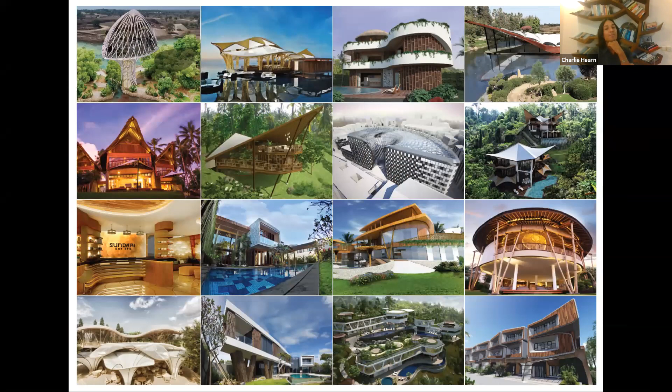We work on a number of types of projects, everything from hospitality, obviously, being in Bali, which is well known for its hospitality aspects, but we also do residential, places of recreation, we've been looking into social housing, and event spaces. So our work is fairly wide-ranging.

But within the company, we share a kind of philosophy, and it's quite a simple one. It's our saying that to improve our well-being, we need to be inspired by the spaces we live in, the built environment, the natural, and their harmonious existence.

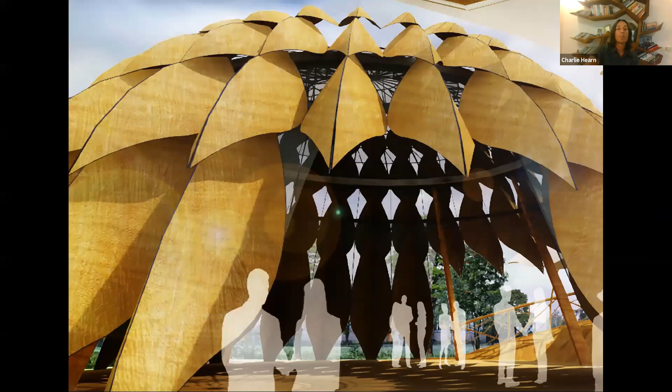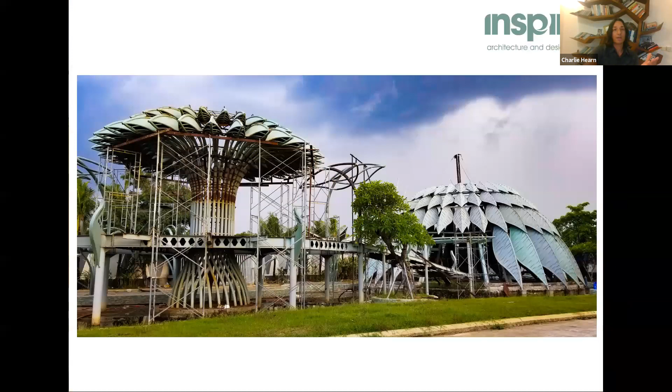This is a project which is actually a community center with pavilions, parks, and places of relaxation. This is an events pavilion, perhaps used for ceremony. This is on an island called Sulawesi, in its capital city Makassar. It becomes a kind of alternate world from the hustle and bustle of quite a busy city, to somewhere that gives a different experience.

Still under construction at the moment, but its design has gone in a direction which brings back the symbolism of the natural world, into a playful sense that creates experience and a sense of longing for what we relate to symbolically in nature.

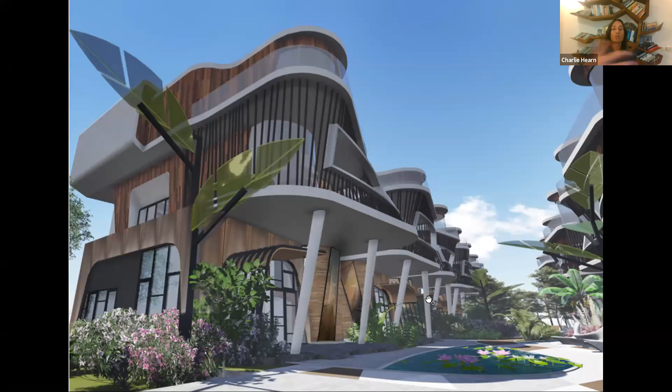This was the first part of the design, which continued to influence the rest of the community built around it. What you find in Indonesia is a lot of these typical townhouse-type architectures—a certain typology of terrace housing.

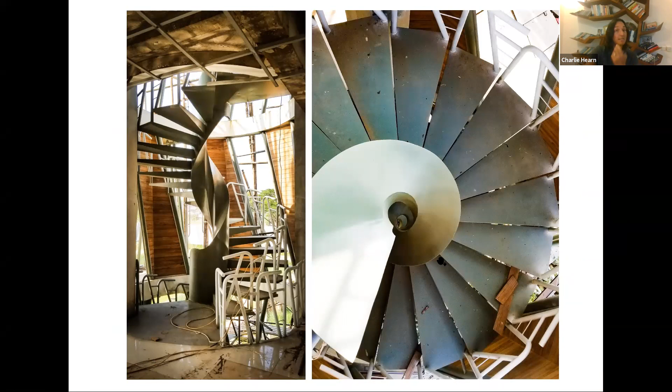So we used this symbolism and this direction of architecture to bring a level of humanity and individualism back into the setting, out of all these individual houses, which would flow from the main center of this community area throughout the whole master plan. And even this flowed through to the inside as well, so we have these interesting spiral staircases and interiors which are very flowing and soft.

All-encompassing to the sense of living—less so machine for living, but perhaps more like a womb experience. When we start in our journey of life, the womb is actually a very functional space, which, like the functional aspect of the rice field, is there to feed, to nurture, to provide sustained living.

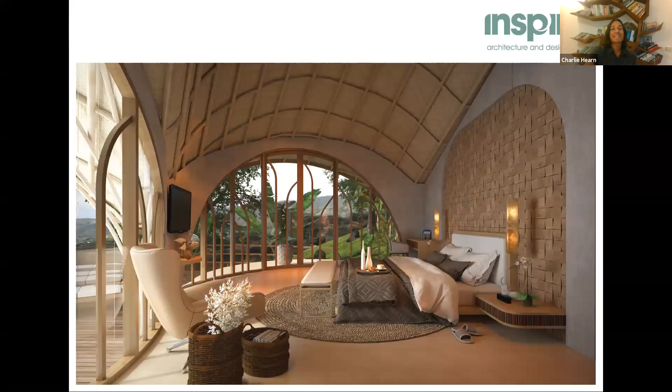So that's perhaps where we spend most of our time, in our bedrooms. Generally, if we look at the way we design from the inside out, our bedrooms are very soft. There's very little in the way of hard corners or sharp edges. We prefer this rounded, naturally oriented, organic feel, both in materiality, form, and aspect.

So we can look at the bedroom as a space where it heals us. From that, it can expand to the rest of the architecture, and this is what it does. When we're designing our forms or our buildings, this sense of flowing and softness extends from the layout to how we start to develop physically.

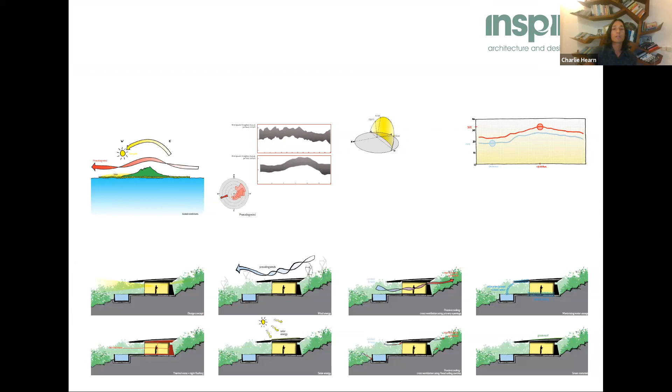As well as taking in all the functional aspects of what constitutes a house—understanding the environment, sun patterns, wind, ways to have natural ventilation and evaporative cooling—all these things come into the fold, as well as our own integral philosophy. So this translates into our rooms, where it begins to have an impact on how we experience space.

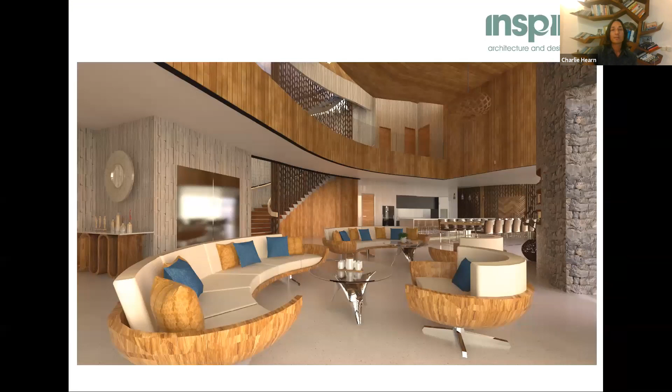So this would perhaps be the kind of typical residence where, for us, it would feel more integrated with elements of nature, through its materiality, through its form, through the way it functions, in terms of minimizing energy, to the flow of space, and how the sense of user experience is perhaps less typical to what one would experience in, say, a minimalist box.

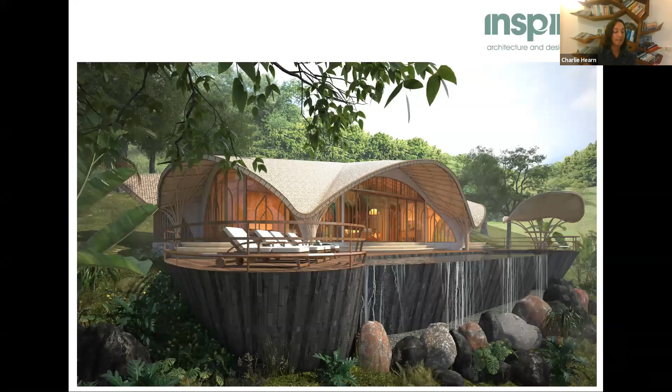But then when we're doing residences, we also have to consider how this works overall in a master plan. From doing individual houses, we also look at how this type of vernacular can be experienced in a community setting as well. So we look to see how we can create sustainable communities, looking at how even the setup of the buildings themselves can mimic the surrounding landscape. Even in that sense, it creates this connection between the insertion of built aspects into the natural context.

And when we look at what eco or sustainable villages intend, we can see how they look to live in harmony with the environment, with the emphasis of protecting the land around them, and working together so the integrity of the land isn't ruined.

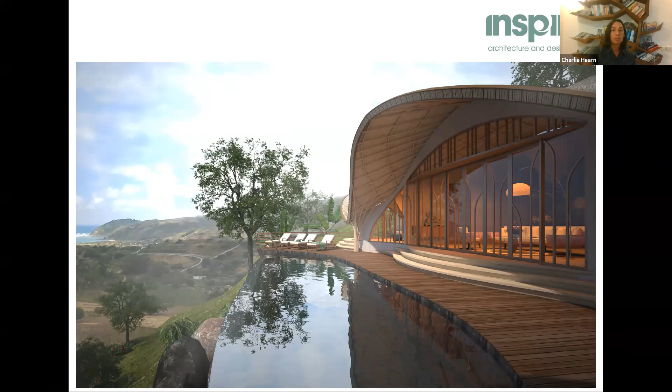Generally, when we look at a sustainable community, we're looking at energy conservation as an essential part of developing sustainable communities—the conservation of energy as resources, using as much clean energy as possible, for example using a lot of grey water systems, using natural materials, local materials that come from the site.

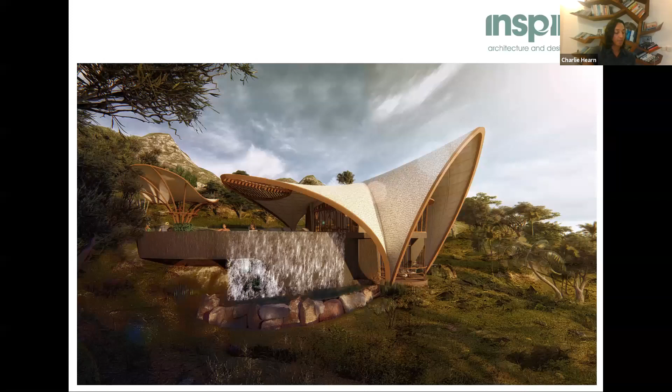Minimizing overly large, heavy structures, keeping buildings light so the impact on the ground is much less. Looking at how it can, even from an economic point of view, support local business and be efficient in the way it runs. Part of that sustenance for a community is having the facilities that provide different aspects. So for this project, that was a residential resort.

So we created a clubhouse as a focal point and as a community center, to serve all the different aspects and ways of living in this large master plan.

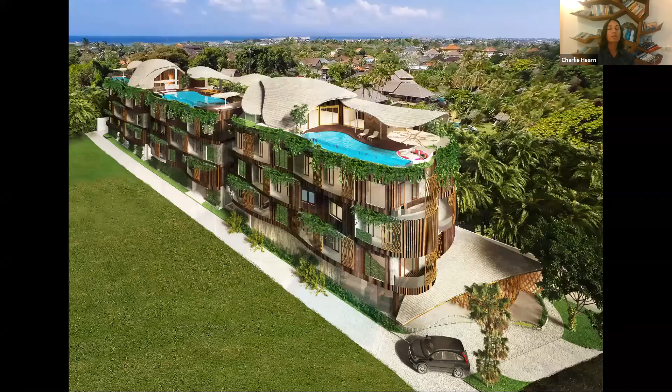And sometimes, looking beyond this large, low-density spread-out area, we also do something more compact—buildings which are more compact. This would be an apartment building where you would have the typical diagram of your one bedroom, two bedroom, to three bedroom places.

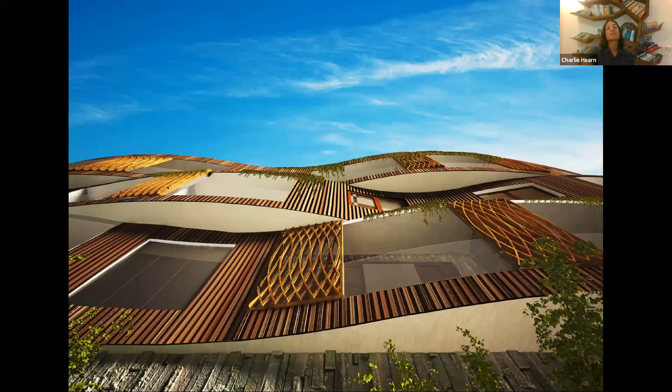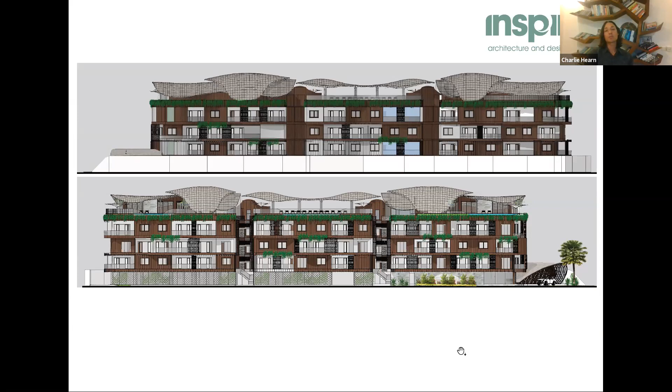But what we look for here is still that sense of individuality, looking at the kind of unity in diversity. Even as we want to be connected, we still need to celebrate the individualism. So I think that's important, even in these condensed blocks, where we can bring that and do things like play with the facades, integrating natural materials from stone to recycled timbers, and of course greenery itself, so they become less like modules but more like a connection of parts.

Here, even in a larger scale, this is using the same requirement for condensed living in this apartment style scenario, but creating a sense of community. And of course, being in somewhere like Bali, it's very natural to have that kind of resort feeling.

I think we're lucky that we can celebrate living in a way which feels like we're on holiday, as opposed to the other way around, slogging it out for a holiday.

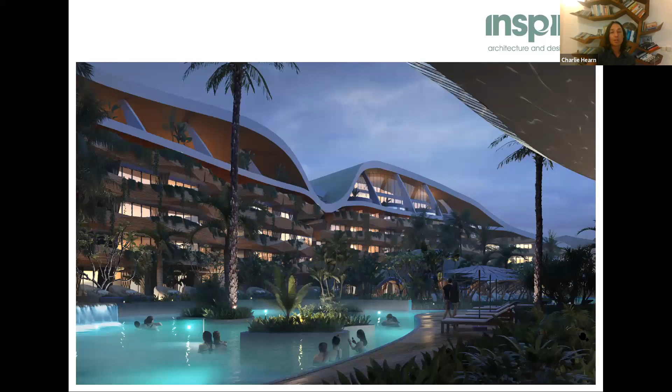The idea here is that we have destinations within the destination. So from the range of apartments itself to a lagoon, a central lagoon pool, various restaurants, jogging tracks, we have even a sense of gardens, different areas and zones to explore. Again, creating this tropical oasis, which helps every dweller, from within their room to looking out over the whole complex, feel this connection with nature overall.

So here would be one of the restaurants within the complex, and again, I would see this almost like a flower of the garden. There's something that very much feels like it grows from the ground, while at the same time, collecting rainwater and using natural materials. It brings life to these kind of spaces and a sense of energy.

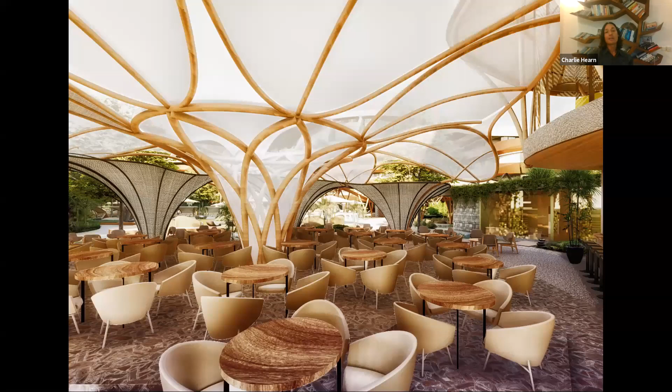So we're creating worlds within worlds, which for me is something exciting. If you can go somewhere where there's a constant sense of discovery, even within an area of say a couple of hectares, you feel like you can discover new elements throughout your movement within the development.

And even here, we can still create holistic spaces. I think a lot of the culture these days, this is an events, a yoga space. And we find now that with a lot of the developments we do, there is a requirement for yoga facilities, holistic spaces, places where there's perhaps a sense of ceremony, which can encompass different types of people, different religions, to express something which enhances well-being.

So moving on to the experiential side, and this is many ways how the technology creates the experience, what aspects or implementations of building creates a user experience which can get passed on from one person to another.

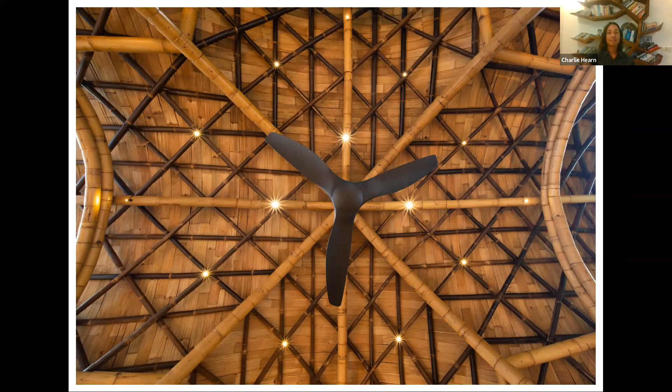So this yoga studio was actually part of a resort we did called Ulaman Eco Retreat, and the experience of doing this was very much a journey into how we can implement architecture into a site, into a setting which is perhaps one of the most beautiful I've seen. So it's very personal to me how I wanted to keep the integrity of this stunningly beautiful area.

And work in a way which enhances both the existing site itself and also the user experience of connecting to this place using architecture and its capabilities of providing habitation. So when we planned out the buildings, we really studied the site from its every contour to its every existing tree, to work our buildings around the existing trees, especially the large old trees that would have been cut down if a building was going to go in its place.

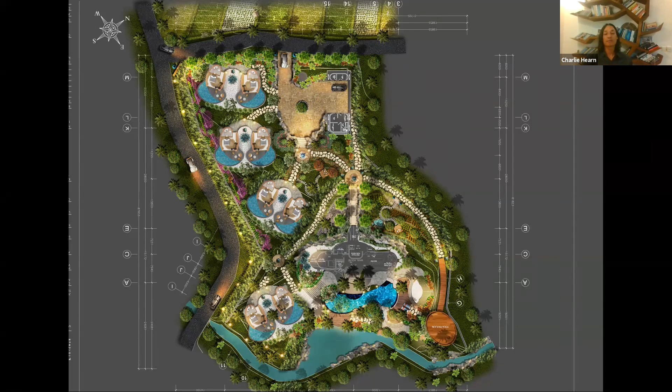From conceptualizing the buildings themselves, again, where there's a space which is so vibrant, we wanted these buildings to embody this sense of life and intrinsic natural energy that's running throughout the site.

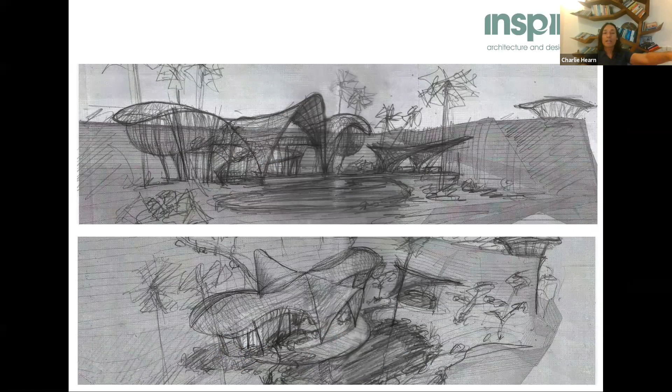So we did this with our sketches and developed this into physical 3D models. We explore it with our renderings, but these are all ways I think are really important, especially as we designed a lot of this. We spent a lot of time there at the site itself, bringing back these sketches, bringing back these models, and just viewing them in real time to see how they really integrate properly. It was a constant loop feedback from the site into our design, back into the site, vice versa.

So when it came to the construction process, we decided that we wanted to use as much of the existing elements of the site as possible. On the site there was a lot of bamboo which we could reuse into the building and treat. We wanted to use all the earth that we dug from cut and fill and reintegrate them into the building. So our route was to use rammed earth as our main form of walls throughout the site, and this is where we had a lot of fun making maquettes to understand the layers and the colors of this beautifully rich soil.

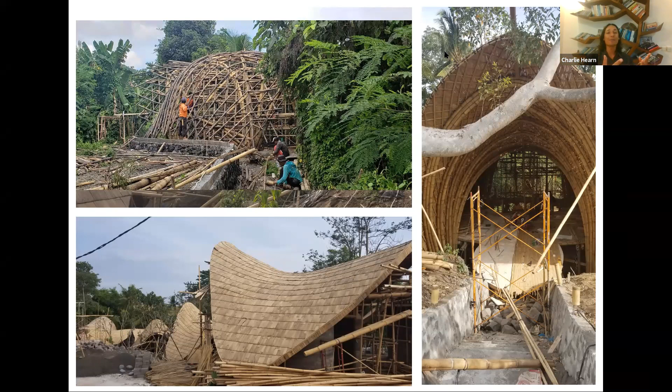And this earth became the founding part of the building. Even in its sequence of construction, the grounded part, the earth, came first, and then from that, everything in terms of the bamboo geometry and structure was built around it. Even in the building process itself, it felt very integrated throughout, as if the elements themselves were just moved, extracted, and then regrown from the ground to create these buildings.

So by the end, we ended up with an array of different structures, each performing their own function, which really was open. It was organic. From every angle, we had a sense of being totally immersed in this luscious tropical surrounding. Even the flow of the buildings, we wanted to have a sense of majesty as each building glided down the hill.

And then we could bring in elements. We had all these existing walls that were actually part of the site, which at one point was used as a quarry for natural building blocks that were very popular about 20 years ago. What was left was a lot of these walls, so we carved into these walls, and within no time, these walls became green and ended up making these carvings look as if they'd existed for thousands of years.

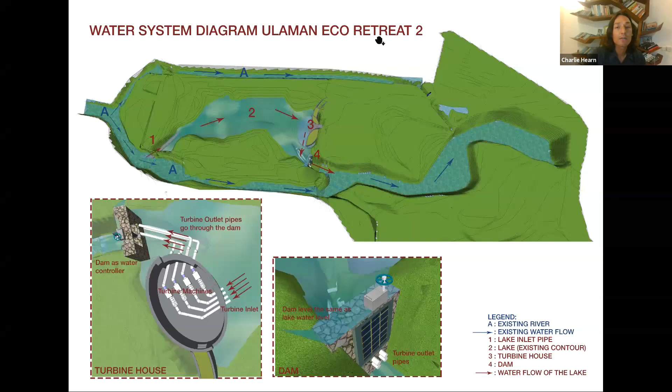What I'm going to do is share a video just to show what we're going to do to this site.

Let's have a look. Okay, let's share this again. Yes.

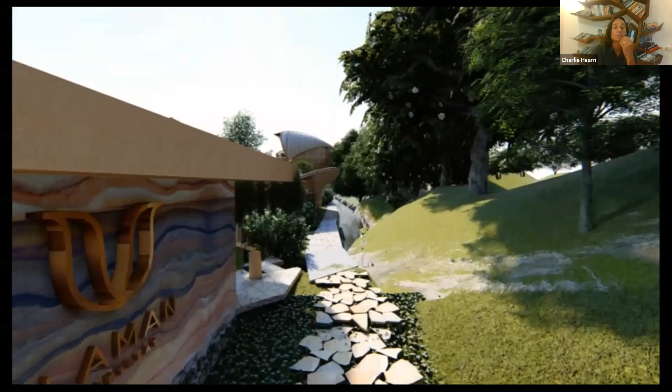So this is the extension of the other side, and this has been a chance for us to explore other sustainable types of building and architecture. This is the lake aspect that we're building. So this is kind of an expansion of the resort, taking the same strategy of keeping the integrity of the existing nature and just further adding and complementing to it.

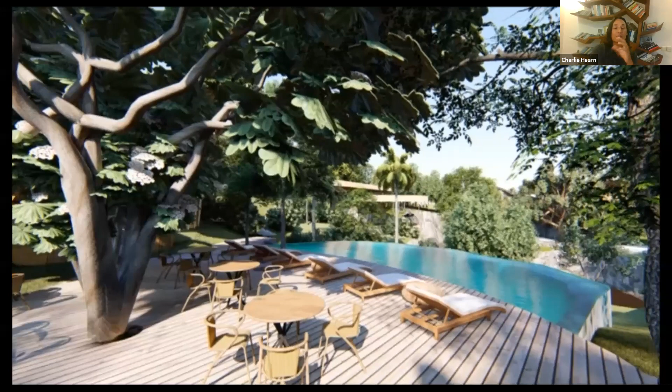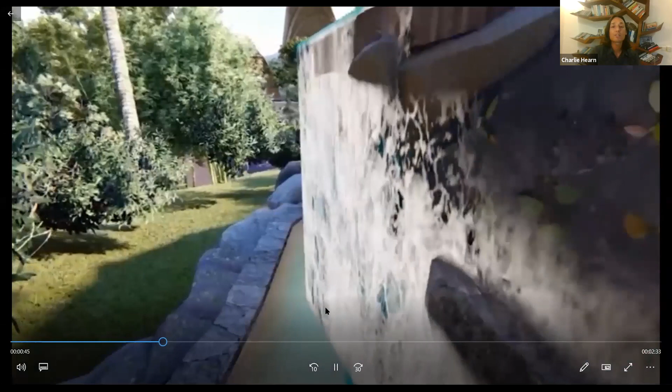Again, with rammed earth, bamboo structures, we're creating these little worlds inside the resort. So in the back there, you can see the existing architecture, and creating communal areas which have a sense of wonder, using large natural rock, natural stone, all locally sourced.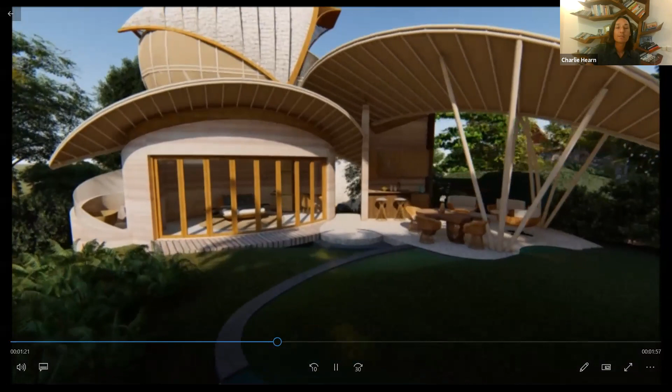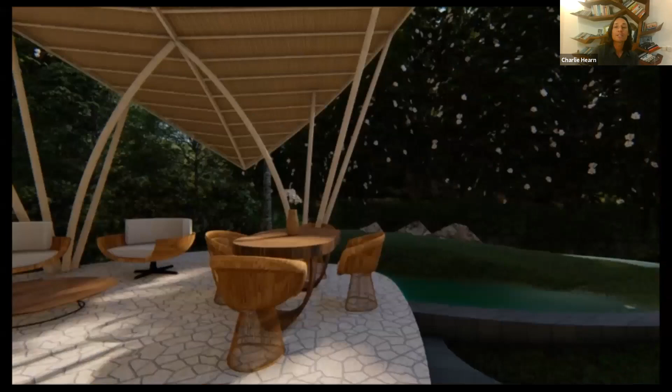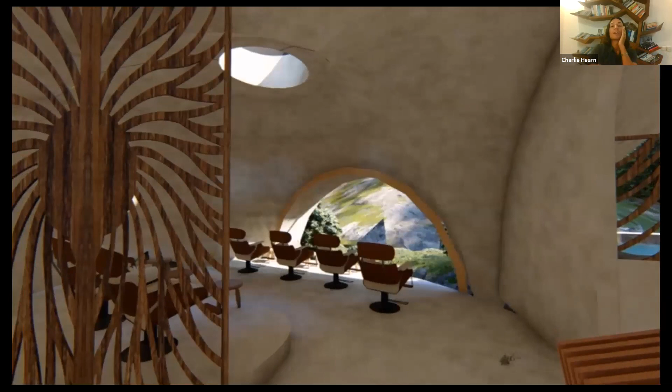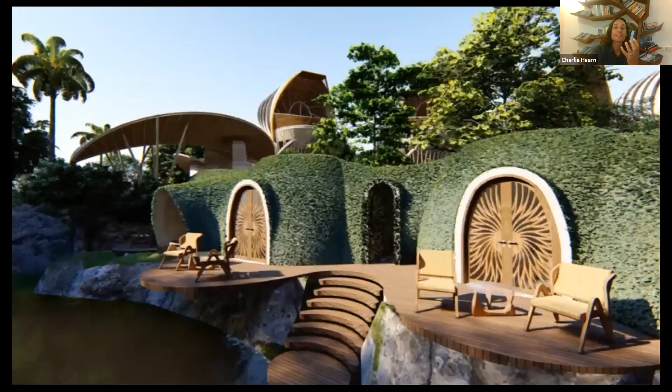These are the restaurant structures, really celebrates the geometry. And here, this kind of semi-underground structure will be made using SIP panels, using recycled EPS with polymer renders. These are very lightweight but incredibly strong materials, which can then contain all this earth-covered structure. So again, maintaining the biodiversity of the site.

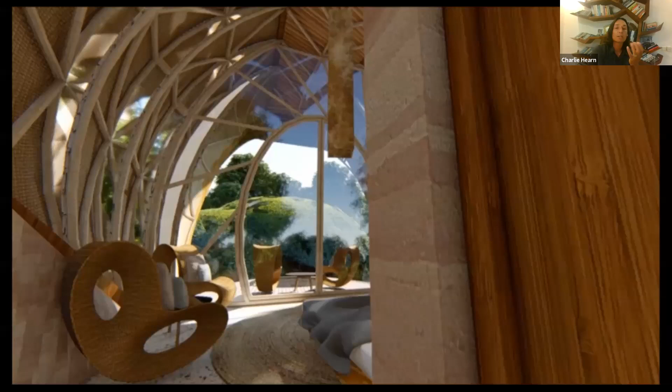Here we have more accommodation, each one of these overlooking the river. And this lake actually will be swimmable, so that we'll have water running through from the surrounding rivers into this lake. And up here is units which are extended up towards the tree canopies and give a different perspective of the surrounding nature.

And this is actually under construction at the moment. I think hopefully next year it'll be complete.

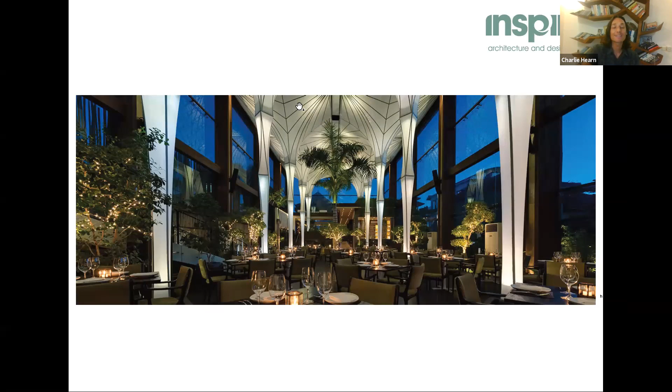So linking from that use of water, we've come to another project, a different project here, which harnesses water. And this also is like a kind of flip from where we're creating architecture that was inserted into nature. This is a great developing building within an urban environment and doing what we can to bring nature back into this urban environment. So in terms of water, what you have here are these large water collecting funnels. These also is the roof, as well as the interior as well. And what these do is collect rainwater and bring water all the way through into the building, which is then filtered and used throughout all the plumbing and for consumption as well.

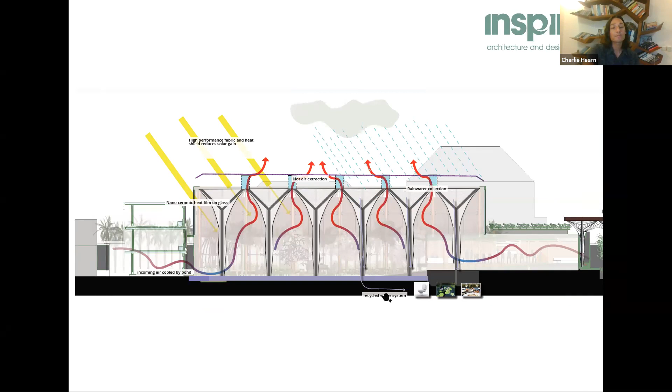And it helps to address the issue of water in Bali, through development, overdevelopment, especially in the hospitality industry. There are concerns of a water shortage, and many of the aquifers close to the coastal areas are drying out or becoming contaminated with salts due to extensive boring. So this building was in many ways an expression of addressing that issue, both by creating this kind of green indoor oasis, indoor garden, but also highlighting this issue of water and bringing it into the building.

So with these fabric funnels, the fabric itself is of a translucent material. So actually, when it's raining, they become kind of like inverted waterfalls and become a showpiece that creates quite an experience for diners and people who come to this place, and becomes a point of conversation, which then highlights this issue of water.

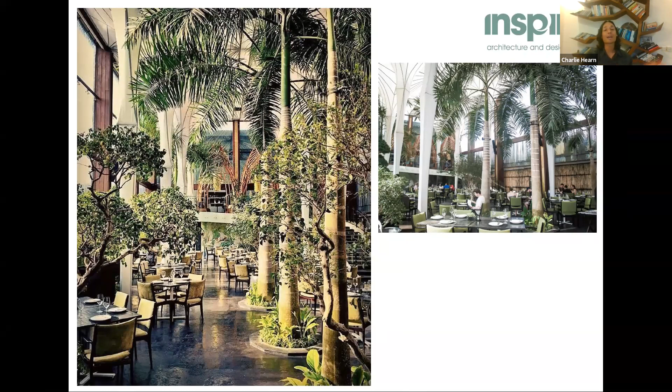And very much keeping it a destination. You know, it's in an area like Bali where there isn't, especially in the urban areas, a lot of town planning for open green spaces and parks. This is one way we can help to integrate that back in. And throughout, even with a lot of the materiality, once we have that theme running throughout the building, it helps to transfer itself onto every element within the building, from these kind of dining pods, which again mimic a lot of these aspects of nature that's been abstracted to a cultural experience that we see a lot in Bali.

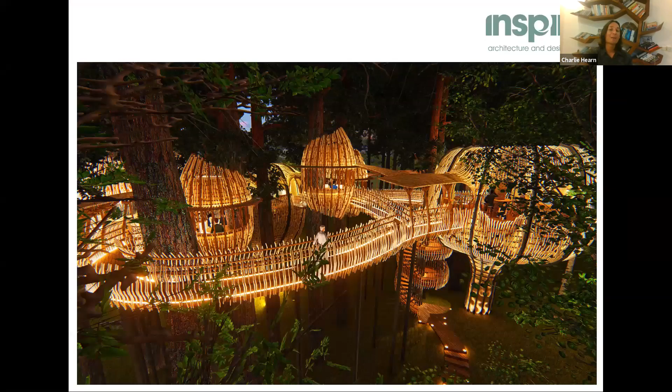While we're on restaurants, here's another one. This flips back to a very natural setting—a forest where we're inserting buildings that completely mimic their environment, from their form to a sense of a unified kind of parasite, almost working with its host to create something better. This is a series of pods where we studied which trees could support certain weights, and created connections from tree to tree up within the canopies.

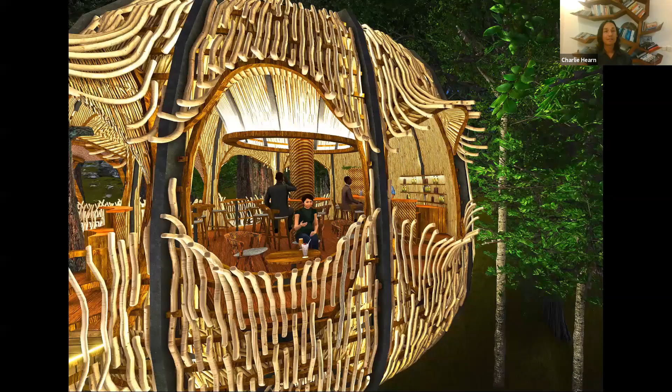The materials themselves use recycled wood, coffee wood, which lends itself to creating these interesting forms, and something quite different in terms of our spatial recognition, but still very much tactile and soft, feeling very harmonious with the natural flow of the area.

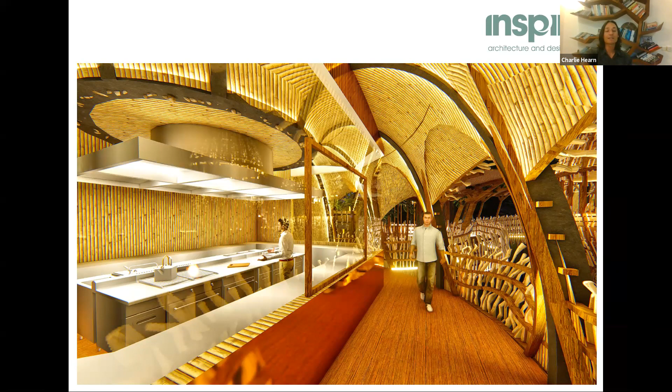At the same time, we can still put in things like kitchens and glass, and a lot of these very strong human elements required for the function of the building, but they can integrate seamlessly.

In the same way, we can do this with abstracting nature. That was the past example, using elements of nature. Here, this space is perhaps using less aspects of natural materials, but abstracting it in such a way that it reconnects us to this organic element and the organicness of our own nature.

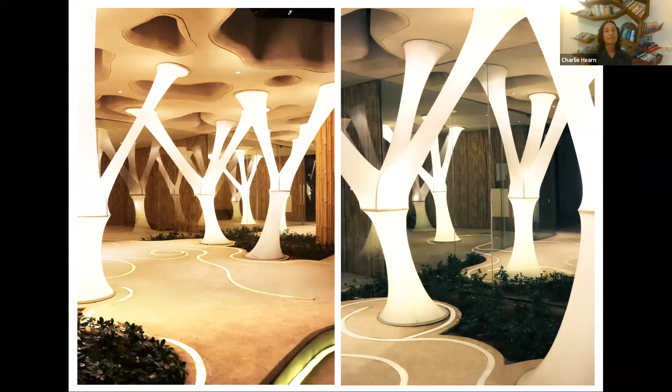Again, this playing with light, and playing with how it looks like light is supporting something heavy and dense—perhaps something symbolic of the ephemeral supporting the material. We use light in many ways to help describe this aspect.

This here is actually a place for wellness, a holistic space—a spa, with even areas such as corridors. We find corridors are very important spaces that can be used to describe our transitions and rites of passage as we journey through our experience.

All of these materials up here are strand woven pressed bamboo, which has a beautiful rich texture. Everything here is bespoke, but brings a very rich, natural quality that some people describe as a kind of eco-lux.

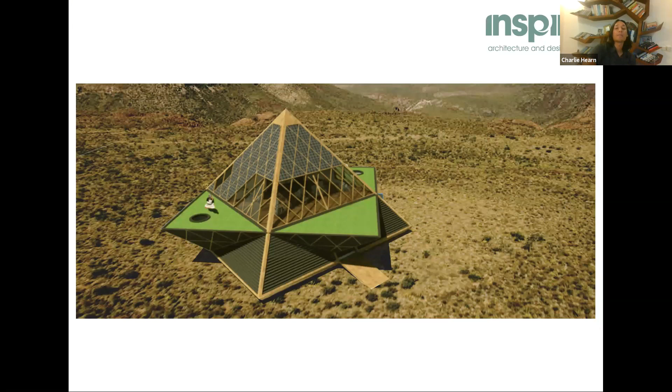Which brings us to our next aspect, the energetic part. Now, going from talking about light—a lot of light—I have one very interesting client who was fascinated by darkness. He wanted to build a dark room retreat, a place where you could live and work, but for certain times you would close up the whole structure and be in pitch black darkness.

Instead of being like solitary confinement in a jail, it is that kind of solitude and darkness, but you'd still have the facility to wash and eat and function in this state. The building cuts itself off from nature when closed, and you're left in darkness, but we still looked to create something with a connection on a much deeper level.

So we looked at certain geometries and how they played out—this kind of Merkaba form, a very geometric shape found throughout the universe, based on the isotropic vector, a term coined by Buckminster Fuller. This relates to his essays on synergetics and how synergetics follows the cosmic logic of structural mathematics and strategies of nature.

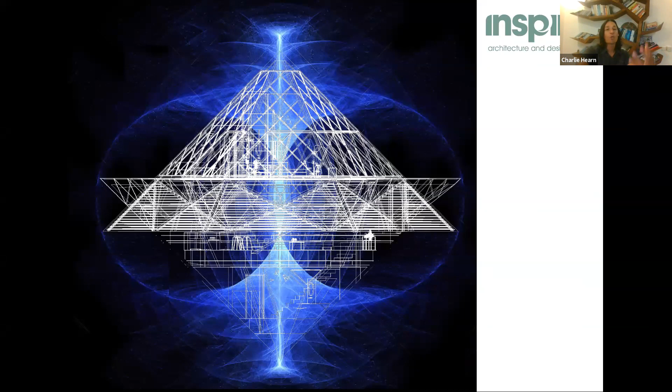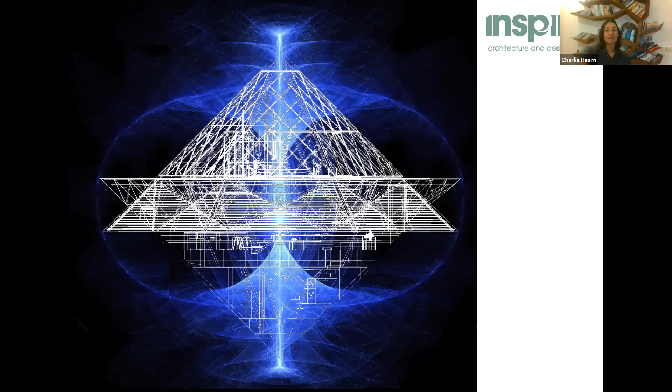And it's these frequencies that create the formation of what we believe to be our perception of matter. When these oscillations of different aspects and states combine, and there's certain harmonics, that's when interesting things can happen. The idea with this type of architecture is that once in the dark, the form of the building, its positioning and structural geometry, can help enhance this sense of resonance, and our own understanding of self and well-being.

This has always been an exploration throughout history, especially with the golden ratio. We've seen it throughout, and the pyramids are an example which really exactly follows the golden ratio. Perhaps more recently, in this last century, we've come to understand the idea of perfect beauty, or its appearance, this sense of proportion that was always idealized from basing things on the golden section.

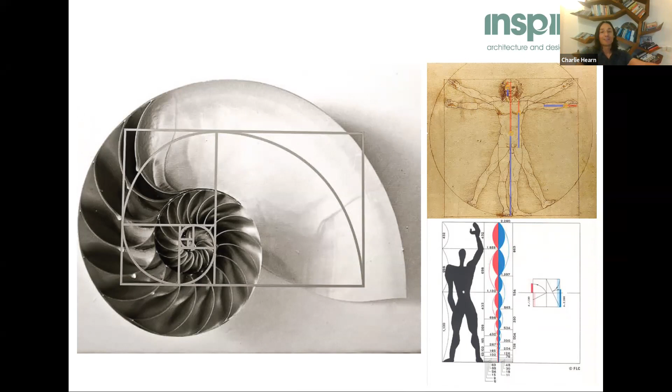I guess what I'd like to feel is that perhaps now we're getting to a stage where we're reverse engineering these Fibonacci sequences into our 3D computational design, and allowing this form of energy which the golden ratio represents back into our buildings. When we see the golden ratio throughout nature, it's a manifestation of what we can describe as life force, or what some people call chi. If this is a manifestation of that, then by reverse engineering it, perhaps we can bring this life force back into our buildings, which will then transfer onto us.

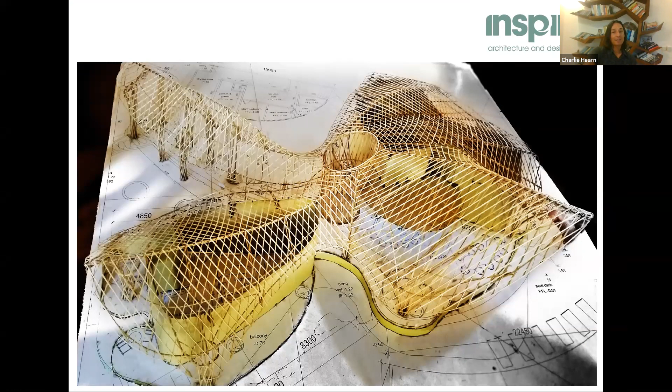So a lot of our buildings now, we've moved on to see how we can use these Fibonacci sequences to invite that life force back into our buildings. Even in some of these past examples, it looks quite easy where we have space and land and can be very expressive to bring this intention back. But even in urban environments, we still have opportunities to bring this back in.

Playing with the geometry, from our facades where space is tight, there's always an opportunity to bring this sense in and invite this energy back into the building, from the outside to the inside. This starts to hark back to some of the Gothic examples, which celebrate geometry and nature together, and then also hence back into our rooms, which are very soft and womb-like. Even if spaces are small, there is opportunity there.

And this is another example. We all know that often when we're designing high-rises, area and space is a big condition. So unfortunately the orthogonal or perpendicular is sometimes so steeply set that it doesn't give much room for wild interpretations of building form. But we still look to see where, even with our constrictions, we can create little opportunities to allow this philosophy to translate itself through the building.

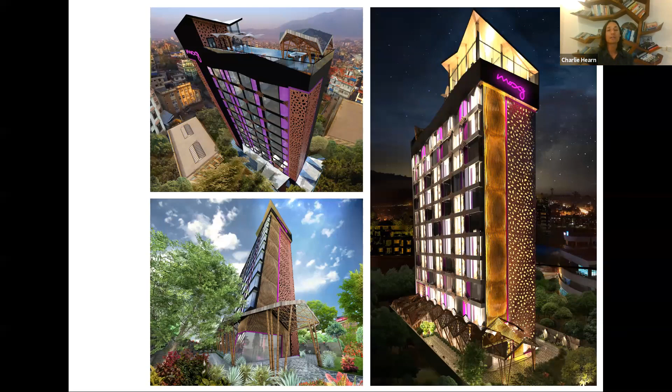So here, this building even brings in elements of bamboo. This is actually in Kathmandu, somewhere with vast amounts of bamboo, which always had a kind of stigma as being a low-class or village-based material. In this sense, we're bringing it back to somewhere far more high-end, into a scene right within the city, where we can have that sense of tactileness and softness and interest, which can inspire our wonderment of various spaces.

It'd be nice if our materials could be assessed in terms of their resonance. At the moment, if we're looking at the energy of materials, we tend to look at their embodied energy, which is great from a sustainability point of view. I guess it would be a no-brainer if natural materials have a frequency of resonance more suited to our own frequencies. Perhaps in the future we combine elements of composites, recycling, or certain materials we're not used to building with before, and see how they combine and increase certain resonances.

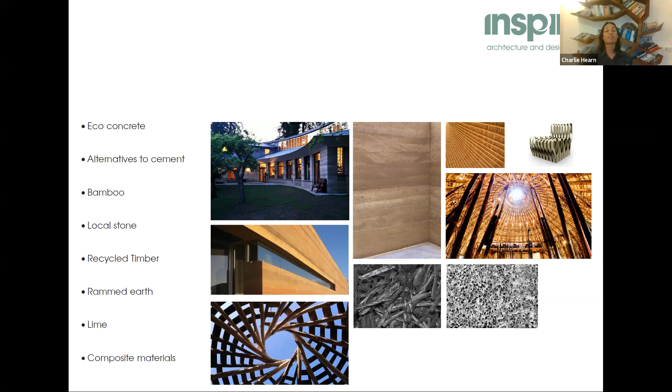For example, for reinforcement now we've been looking at things like basalt, and perhaps when you combine something like basalt with earth or timber, there's this oscillation that occurs, and I think that's something that will be researched further in the future. These are the other materials we're using now. A lot of the bamboo itself is becoming more of a process, being processed into blocks or strand-woven dense materials, which can be utilized structurally in different ways.

So I want to finish off on one project which embodies this sense of research and looking at sustainability and integration of architecture into nature and vice versa. This is the design of something called Youthtopia. This building here is what we call a drop pod. It uses composite panels, it's a very lightweight structure, and has very minimal impact on the environment.

This place, Youthtopia, is set up by two girls here who have been big game changers. They set up an organization called Bye Bye Plastic Bags, a youth-led movement to tackle the problems of plastic pollution and waste. Their current project is to create a space where change makers, or anyone interested in becoming a change maker, can learn the skills and methods to create and inspire change. So we wanted to create a space which embodied all of this. I'm going to show you another little video.

Just play this. This is in a very remote area.

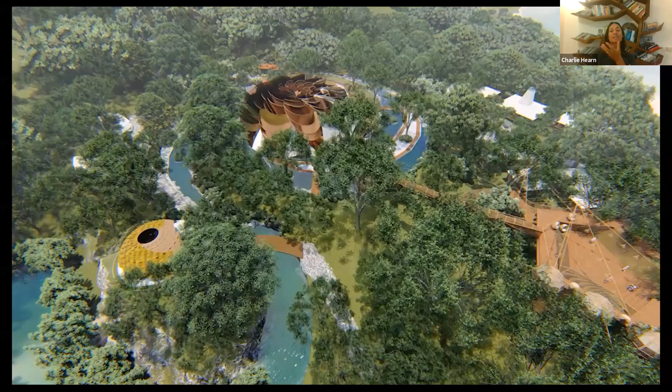And what we are looking to do is use it as a place of exploration, to explore different types of bioholistic architecture that can be used as a base to develop further types of architecture, develop forms of sustainable living.

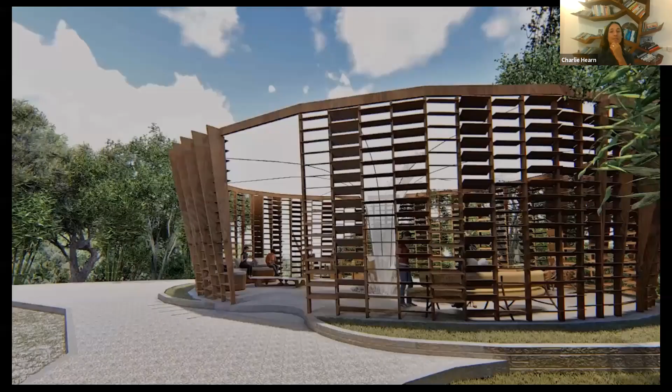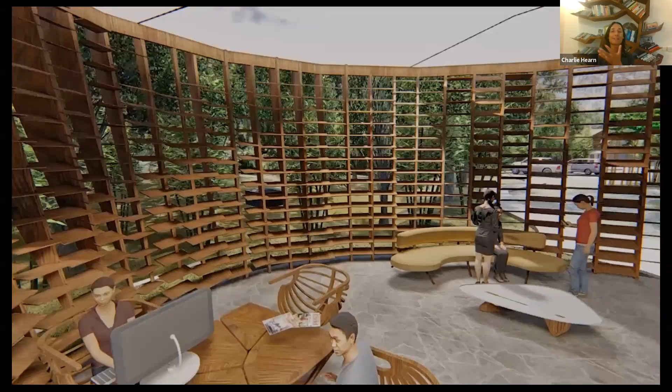And because it's for youth, it's playful. It has a story that goes around. So the idea is that you arrive here, and your entry into the whole site is via this flying fox, and through the tree canopies, arriving at the place.

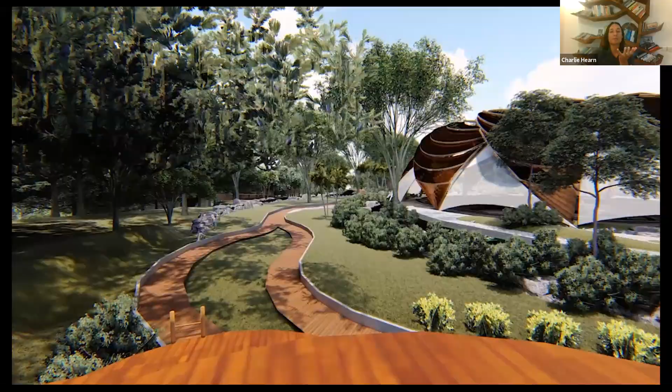So here you come in, you're welcomed, and the first major building that you come across is the conference center, the amphitheater, the jewel which creates discussion and forums.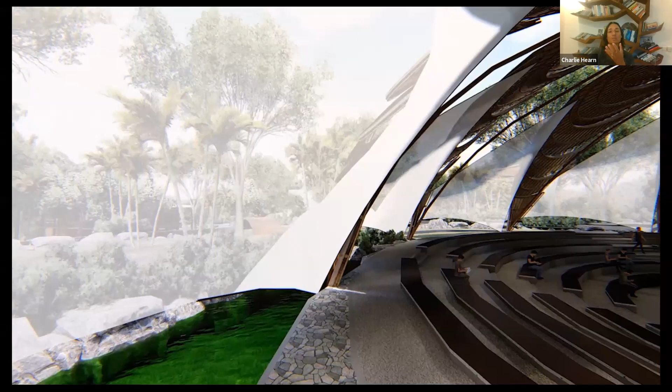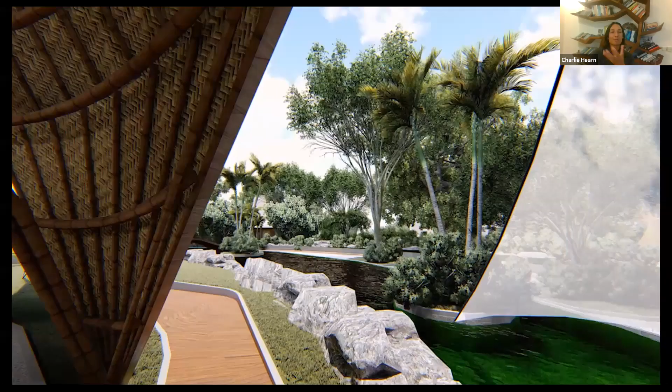So this is a very large, elaborate bamboo and tensile fabric structure, again, which uses geometry, the idea it attracts energy into the space.

And here we have different various labs, all using their own language and different technologies, structural systems and things to create their forms.

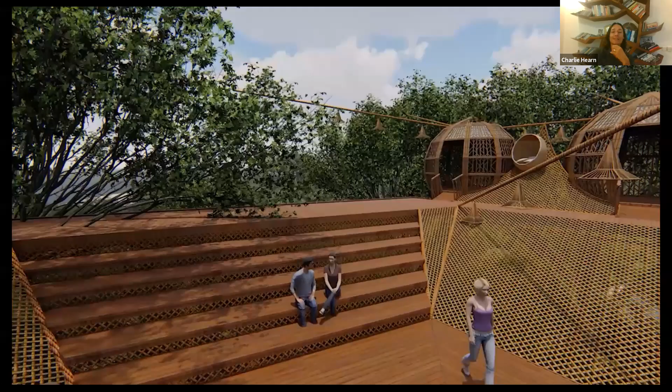Here we have something quite playful, which is a kind of netted structure, connected to the trees, connecting to different levels and areas which host various activities and classes.

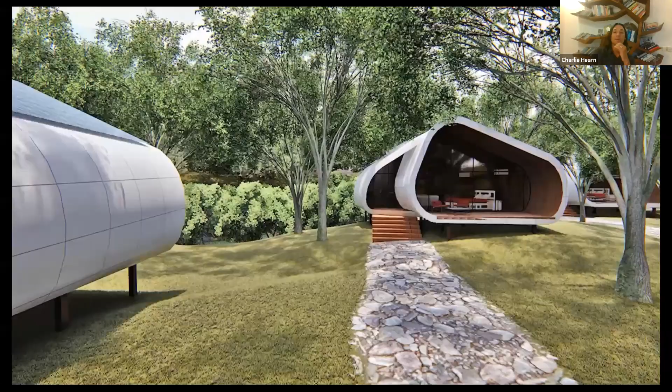And here are the drop pods, and this is a way of exploring a compacted, minimal living, which these kind of pods could be dropped anywhere, and they're self-sustaining.

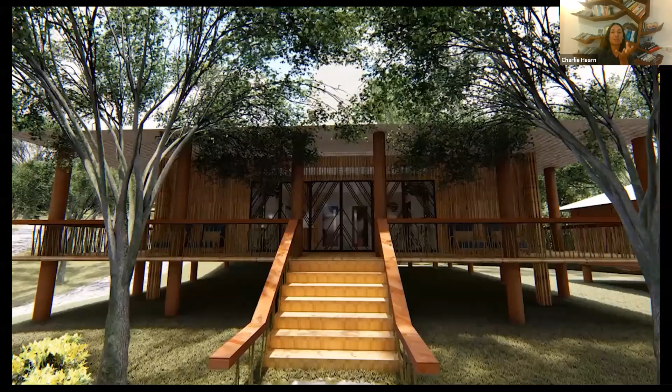And here, this area kind of pays respect to the existing vernacular, which is common in this part of Indonesia. And these traditional buildings actually in themselves were always originally made from very sustainable materials.

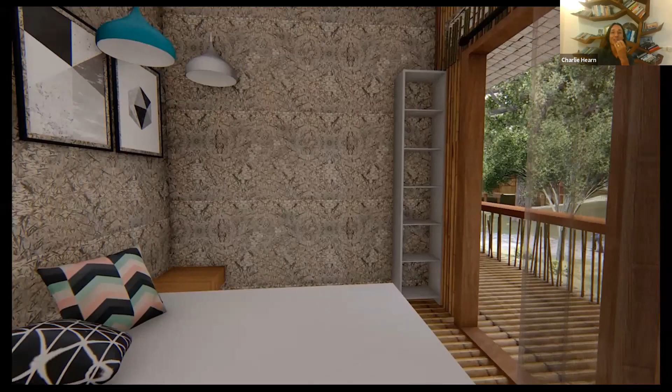And in this case, they'll be used as the accommodation for the participants that come to these camps.

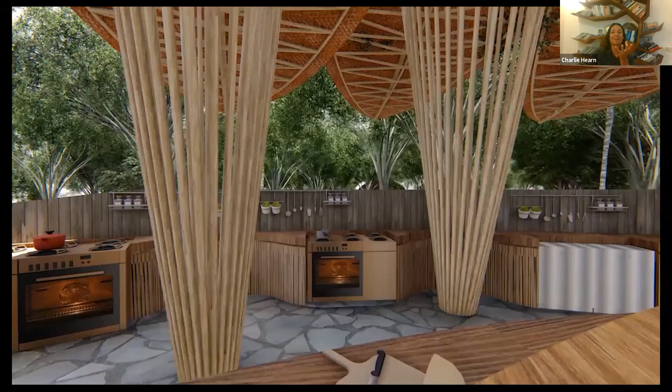Here by the beach is the nurturing, incubating restaurant, cooking class, eating hub.

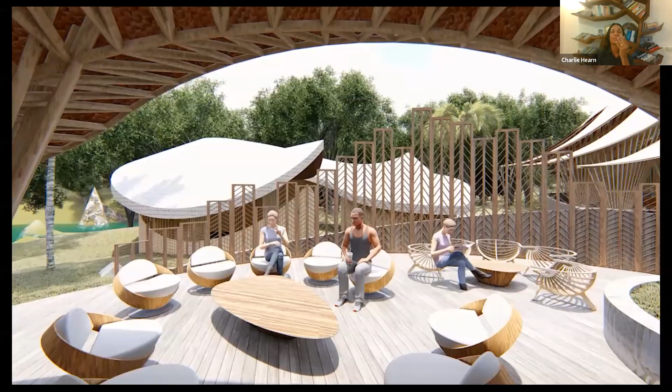Yeah, again, this uses bamboo structures. But again, very expressive in terms of the philosophy of building and form, and kind of culture that wants to be created in this space.

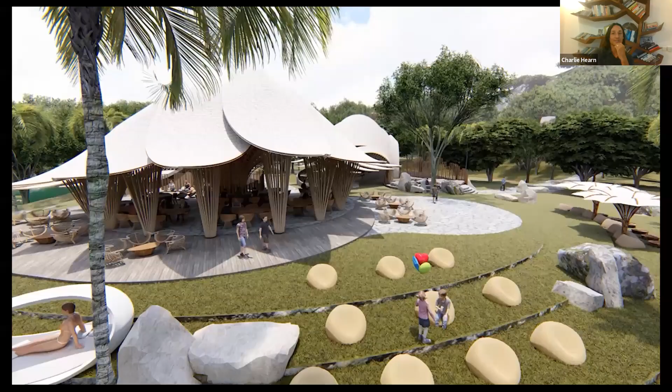Yeah, there we are. Yeah, stop that, and I'll just finish off on... let's see. Oh yeah, where we are here. I'll finish off when we talk about culture.

I think what we're doing is something that's actually happening worldwide anyway. We know people value wellness. People are more concerned about health, healing. We're fully aware of the need to heal both ourselves, in terms of our own self-improvement, and also how that affects the wider world as well.

I think we're all very aware how it's this micro-macro relationship, a form of culture that really is spreading, even in times where it seems like things are dark.

We have an expressive desire, a deep desire to create change and a new way of living, and perhaps the idea of these dense cities and the way we're living, even through COVID, has forced us to reevaluate the way we live. Could have a huge effect on design culture and the needs for something which is far more holistic.

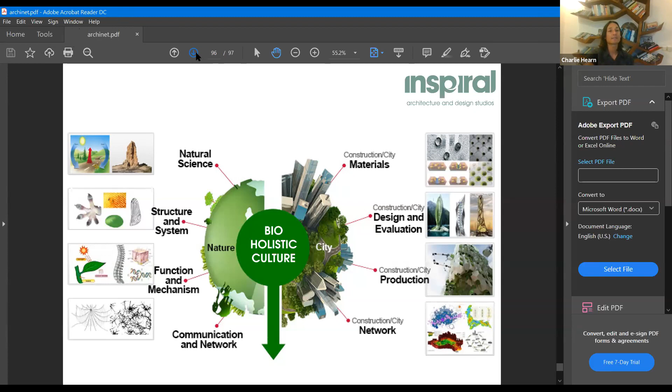So this question from Russia: the mimicking in the projects is in the form and the materials. Are trials to mimic something related to biosystems of nature and dealing with the context, for example?

Oh yeah, I mean, absolutely. You know, the whole idea of biomimicry is looking at how the functioning aspects, whether it's the way the hairs on our skin move, or on an animal move to ventilate or create breathability. These kind of fundamental technologies are definitely very much an integral part of creating this kind of unified nature and man-made intervention.